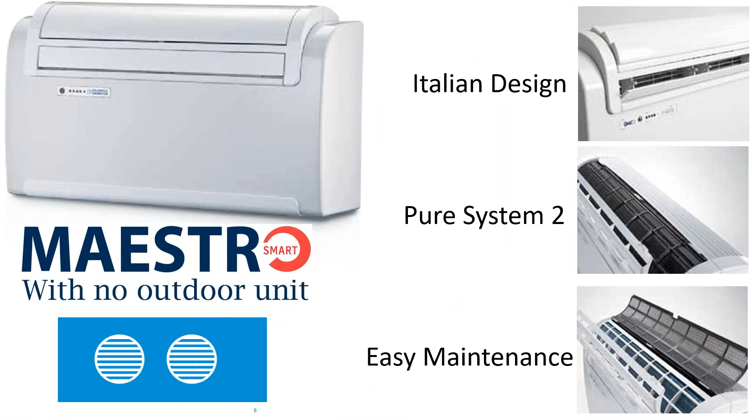So again, the impact on the outside wall is minimal by comparison to window units and, of course, split systems. And it is an Italian design. It uses a Pure System 2 for filtering, and the filters are easily accessible, and you can see them on the right-hand side here at the bottom, where half the filter is shown turned up, and in the middle picture you can see the filter in place.

Okay, and there are additional filters that come with the unit. There is a black filter that is carbon activated, and there is a green filter that is designed to remove particulate. So those are optional. They come with the unit. They can be installed directly on the existing filters. And of course, we recommend that the filters be cleaned on a regular basis.

The maintenance routine for this unit is once a year you would clean the filter. You would check and clean, if needed, the coils and also the drain pan and the drain line. So the maintenance is very minimal, but it does have to be done.

I can tell you that most of the calls I get where the unit shuts down on a code that says the drain is plugged, or the unit goes out on high pressure, it's almost always because the filters, the coil are dirty, or the drain pan is dirty. So I'll tell the folks on the phone, you know, clean the filter, clean the coil, clean the drain pan, and if you still have a problem, call me back. And I almost never hear back from them.

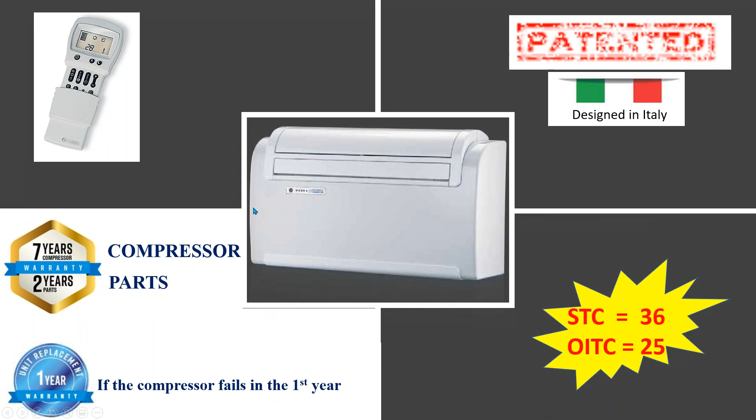So you can see in the upper left there, every unit comes with a remote control. I am beta testing right now a factory wireless Wi-Fi connector, and also some third-party vendors with Wi-Fi capable devices. So stay tuned. There'll be a lot more information on that coming.

It is a patented design. Nobody in the world has anything quite like this. There's a small company, Nova, up in Canada, that is actually a former engineer of Olympia Splendid's, but their product is a smaller version that has yet to receive any type of certification. So currently, I know that it's only sold in Canada, but it's the closest thing you may find to ours, but they have, again, one model.

The warranty on the unit is 7 years on the compressor, 2 years on the parts. And if a compressor fails in the first year, then we just give you a new unit, okay? And then, of course, that unit would have to be sent back to me or to the nearest service center. And that service center, we will investigate, because we have very, very few problems with parts. In fact, I have never seen a compressor fail in the US or Canada at this point.

And I think of the 500,000 that are in the field for as long as 20 years, only 2 compressors have been returned to the factory, and both of those, when torn down, were shown to have been hit by lightning.

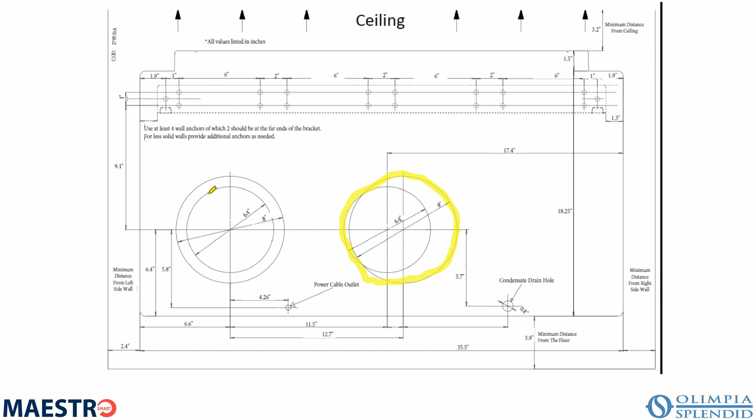And you can see that there are two possibilities for your installation, okay? You have these 8-inch holes that you can use, or you can have the 6.4-inch holes. We strongly recommend that the unit be installed with the 8-inch hole openings and not the 6.4.

You can use the 6.4, but you have a reduction in efficiency and a slightly higher possible sound transmission, because now the velocity of your air is going to be a little higher. But in some cases, when you have geometric constraints that don't allow for the 8-inch, you can use either 8 or 6.4.

The other penetration you're going to make in the building is the drain. So in your market, I think you guys have some humidity now and then. So this unit, for the most part, will re-evaporate most of the condensate. But in your market, which is obviously high humidity, you may not be able to re-evaporate all of the condensate. And so if there is excess condensate, it has to drain out through a drain hole, which should be a part of your installation, okay?

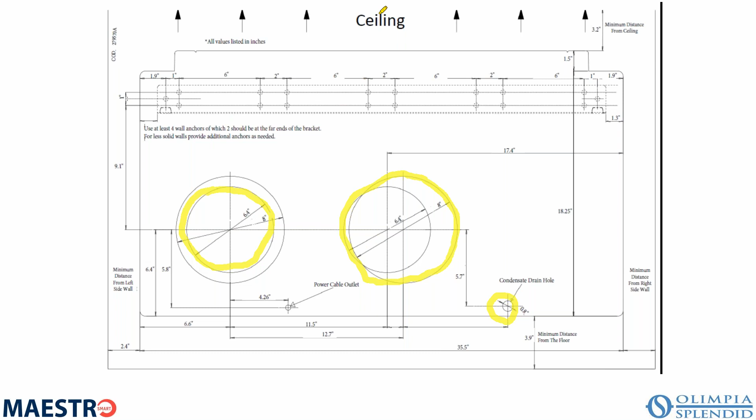So this template gets put on the wall, and then you can level it and then cut your holes. Note that between the two 8-inch or the two 6.4 holes, you have just over 4 inches. So two 8-inch holes should allow you to straddle a beam that's going up inside your wall. So you can have a 2x4 or 2x6 in the middle of those two holes and give you all the access that you need.

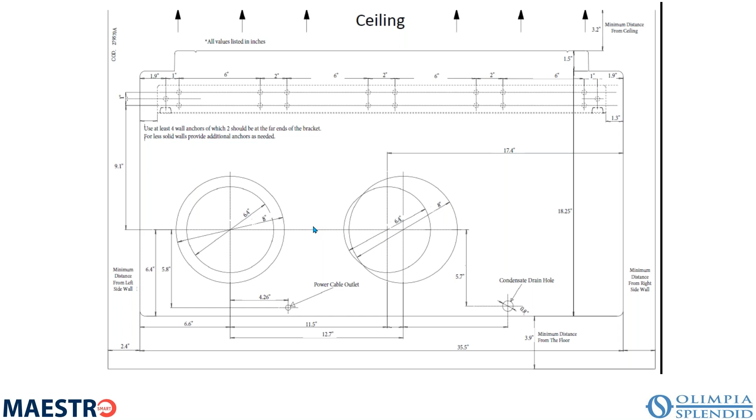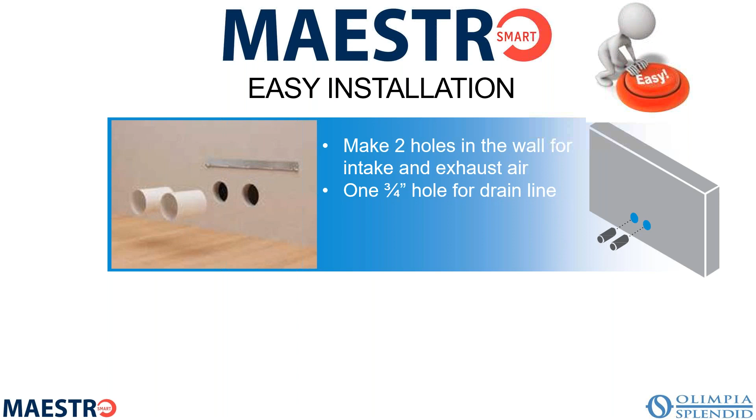So again, you make the two holes in the wall and you mount the bracket, and you can see the bracket here mounted on the wall. And of course, these units weigh about 86 pounds. So you want to make sure that you use anchors into the studs when possible, so that you can carry that 86-pound weight.

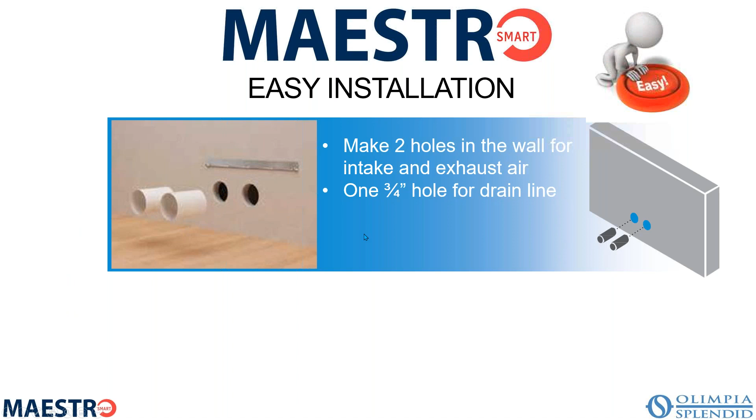So once you cut your hole between the indoor and the outdoor, and of course your 3/4 inch hole for your drain, then you put your duct on. So there's ductwork that goes between the inside ring and the outside grill, and there you see your ductwork, and this ships with the unit. And it's nothing more than a flat plastic that is then rolled into an 8-inch or 6.4-inch duct.

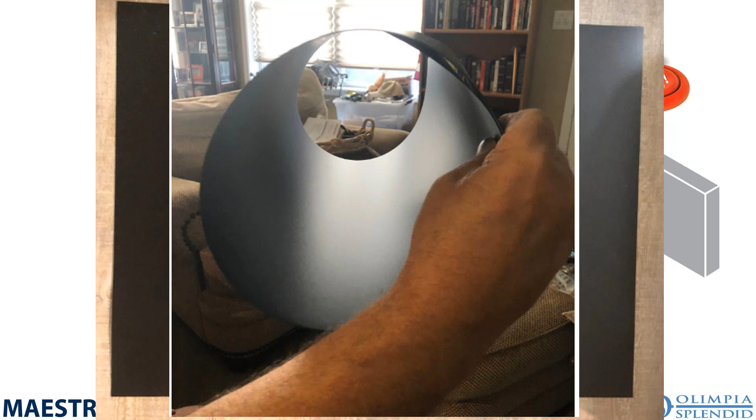And you cut it to the width of the wall. You put tape on the seam on the top and tape on the inside seam, and then you install that duct so that the seam is at the top. And when you drill your holes, you want to drill your holes so that it is a slight incline to the outside, and I'll show you a picture of that shortly. That way, if any water drives in because of a driving rain, it just rolls back out again off of this plastic. So that's why you want that seam on the top.

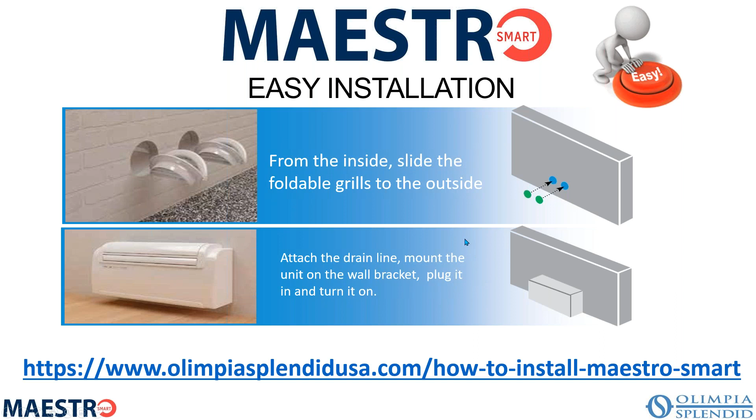And then you can install this whole thing from the inside without ever having to go outside, again, depending on the construction of your building. So the grills fold in half. So from inside the house, you put the chains and the springs on the grill, you fold them in half, and you push them through the hole, and then you pull them tight up against the wall. You're done outside. Okay.

And then again, once you get the unit on the wall, as you see in this lower left, I always tell people to use something that's thick, 3 or 4 inches, so that when you hang it on the bracket, you can keep the bottom held out, and then you can get your drain connected to it much easier.

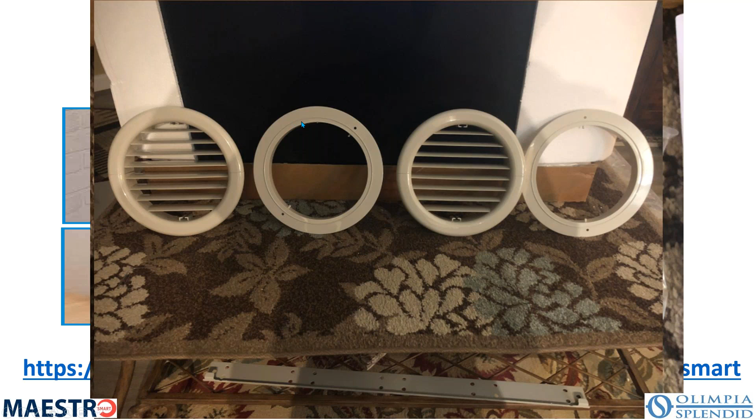So there you see the outside grill and the inside ring. And that plastic piece that was in that bag attaches directly to one side of the spring, and then you slide it into this little extension here on the outside grill. So now the outside grill has that spring and chain.

Fold the grill in half, stick it out through the wall, and then you pull the chains tight so that they clip and the chains mount on these little tabs on the inside ring. And you are done with the duct work. You are done with the grills. Now you can mount the unit on the wall.

The unit also comes with some foam tape. And after you put the grill on, you put the foam around the inside of this ring for both the intake and the exhaust. And then when the unit slides down against there, it makes a good solid seal.

And again, you can see the bracket down here that the unit mounts on. You see the two little clips here, and that's what actually holds the unit. And it's drilled in various places so that you can get into a stud situation. But if the studs fall outside of these holes, then you simply have to drill a couple of holes that will match your application.

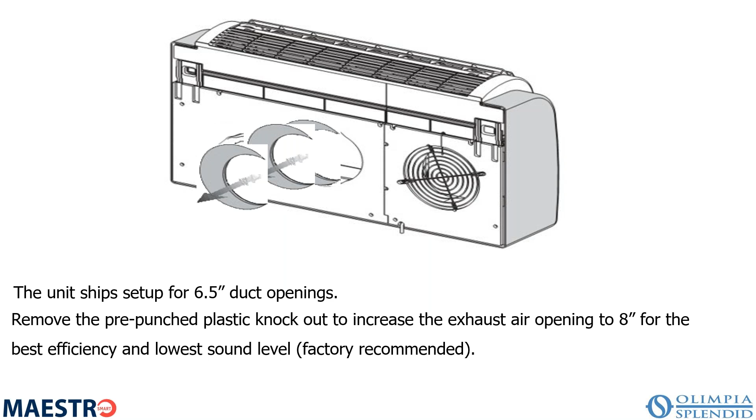When you install, the unit comes shipped from the factory for 6.5-inch openings. So if you're using the recommended 8-inch openings, you have to break off this tab, which is sort of like a crescent-shaped piece of composite plastic that is insulated. And so you have to remove that in order to have the full airflow required for the 8-inch holes. Okay.

And again, you're going to install your air intake and exhaust grills. Here you see the duct work that's gone through. Notice that it is pitched to the outside to allow any water from driving rain to come back out again.

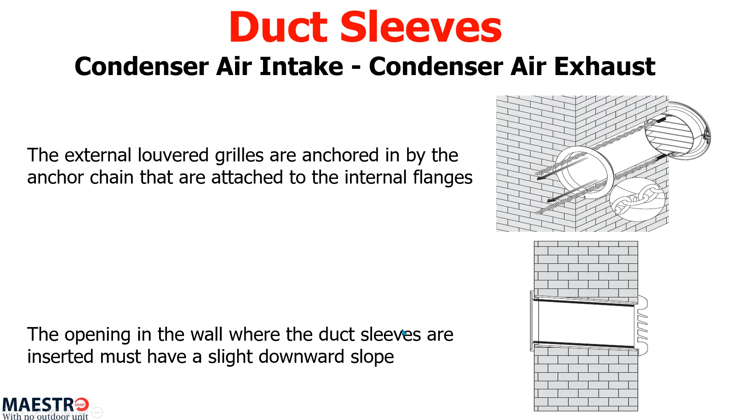When you install the unit, as I mentioned earlier, it can be either top or bottom installation, meaning as close as 4 inches to the floor or as close as 4 inches to the ceiling, and you can be on that wall anywhere in between. But if you install it in a ceiling application, the unit comes from the factory configured for a low application. So you have to turn the flapper if you're installing it in a high application. Okay, and it just takes a couple of minutes, and you change that, and now the air is pointing down as opposed to pointing up.

So if your unit turns off because of high condensate, it's usually a blocked drain or floats that aren't working correctly. Could be a pump that's failed. But again, these happen very, very infrequently. Okay. So that's a very quick overview of how the unit gets installed. Any questions at this point?

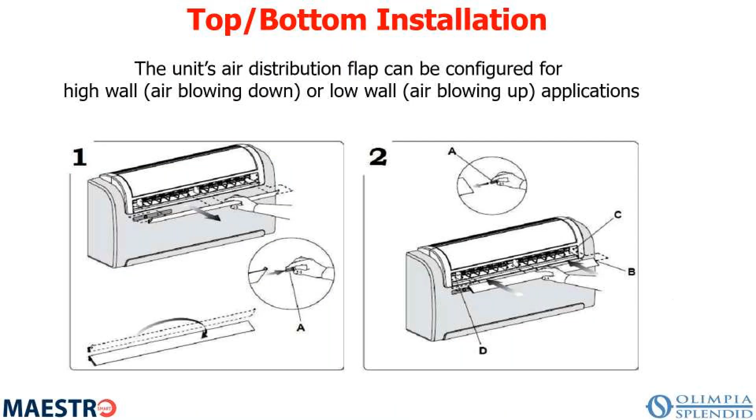Well, I think you answered some of them that I've been taking notes on. That condensate pump, though, you said it pumps up to a slinger. Correct. So where does the drain then come off? Still a pan under the condenser coil? Yeah, so under the evaporator coil and under the condenser coil, both, there is a drain pan. You can see the drain pan right here, okay?

Okay. And so the pump pumps it over the condenser coil, though. Correct. And the pump is only used in cooling mode, okay? Right. So in cooling mode, we pump the condensate up to the condenser where it re-evaporates, and again, 90% of it will be re-evaporated, but there'll still be in your market, I'm sure, some leftover condensate. In many of our markets, they never see any condensate in the summer because it all re-evaporates. But in your part of Florida, obviously very, very humid, so you may see some condensate come out in the summer, and that would be whatever excess is not being re-evaporated.

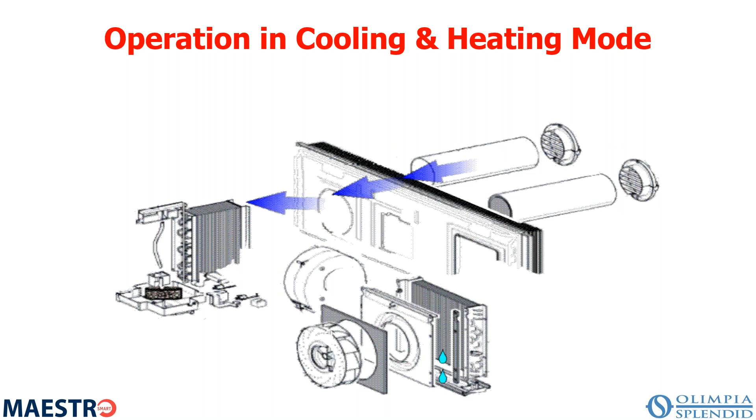Right. In the wintertime, this is a heat pump, so in the wintertime, we do not activate the pump. It doesn't do anything in heating mode, and we activate what's called a thermo actuator, which basically is a plunger that comes down and opens the seal so that the condensate from the defrost mode will just drain outside. Okay, so that makes sense?

Yeah, that goes back to the pump only operates inside the unit. It does not pump condensate. The condensate is gravity fed. That's correct. If condensate is coming out of the drain line itself, that is just a gravity feed, just like any other unit. It drops down and goes out.

Right. So now on the filters, you said there's 3 available: the micron, the green, and I guess the black that was shown. Any one of those 3, but can you not use them in combination with one another? Yes, you can. And typically that's what happens. And I'll see if I have, I know I have somewhere a better picture of those filters, but typically I don't show that all the time. But let's see if I can't find a picture of those filters. I know I have it.

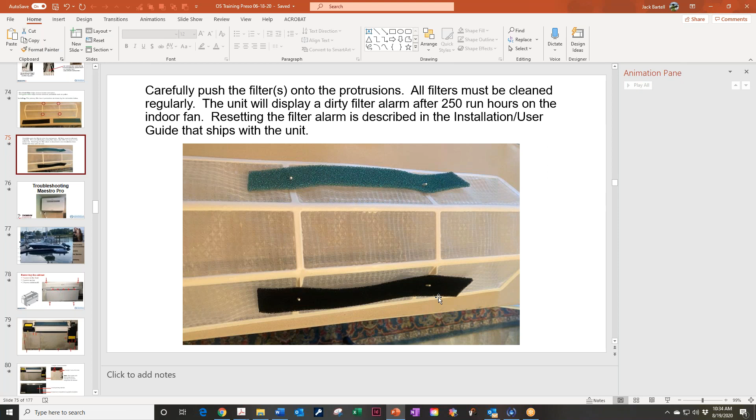There we go. Okay. So this is actually shown from the Pro model, but the green filter, and of course on the Smart model, the filter is black. On the Pro model, the primary filter is white, but both of them come with this green filter and this black filter. The black filter removes smoke and odors, and the green filter removes airborne particulates such as pollen. Here on the Pro model, it just mounts on these little tabs, and there are similar tabs on the Smart model.

And you see, these extra filters are not as big as the main filter, but keep in mind you're recirculating that air through, so it's constantly taking out pollen and constantly taking out smoke or odors. But again, these filters, the black and the green, are considered optional. If the consumer isn't as concerned about that, they don't have to put them on. But if they do put them on, then they just are cleaned on the same interval that the primary filter is cleaned.

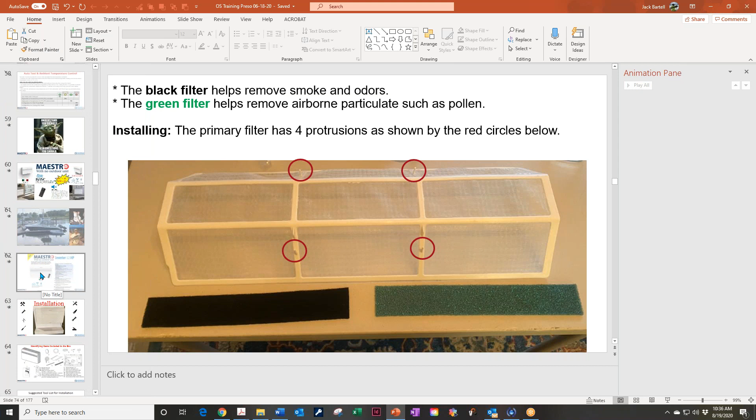So we have a timer that is on the control board, and when you reach 250 hours of fan operation, this red LED will come on for the Smart and tell you it's time to clean your filter. Okay. Yeah, but the filters, as you just pointed out, the green and the black are not as big as the primary filter. They are just auxiliary filters. Yes, and again, they are designed to filter the air as the unit is continuously operating, as long as that fan is on. So it collects particulate and cleans the air in the space, and they get washed on a regular basis.

So, what's the maximum outdoor air temperature for condenser air that these things like to see? We prefer applications where we get our full capacity, below 105 degrees Fahrenheit. We can operate up to 115 degrees Fahrenheit as designed, but when you get above 105 degrees Fahrenheit, you start to drop off capacity, and it becomes, what's the cost benefit of having reduced capacity when you have your highest ambient condition.

But in your market, I think you very rarely see temperatures over 95, although it comes with 75% relative humidity too. Yeah. Okay.

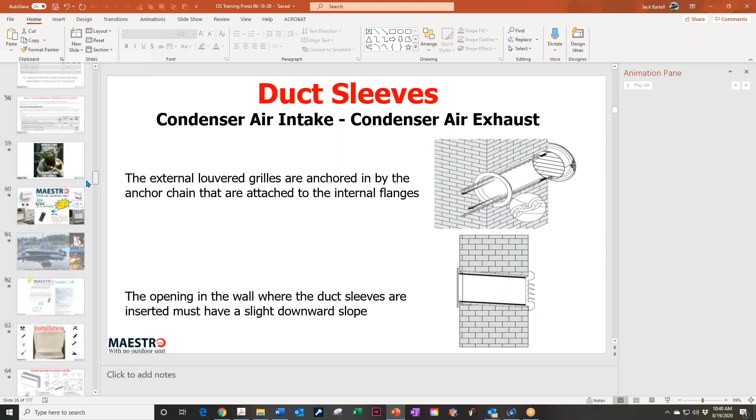Yeah, because I was going to say, as far as PTAC units, and I don't know if Dan or Nick have any other opinion on this, but I don't know that PTAC units, their sleeves or grills, are rated Miami-Dade hurricane. And that I don't know either.

I wanted to move to, because as you bring up PTACs, well, it's the problem with hiding slides, sometimes you can't find them. But we do have a PTAC kit, the PTAC retrofit kit. It's nothing more than a fiberglass cube made out of 1.5 inch duct board. And I've installed a couple of them in the Miami area already, and they work perfectly. So essentially what you do is you remove the PTAC, but you leave the sleeve in place.

And I don't understand why I'm not finding it. I have a picture of it somewhere. That's so weird. Aha, I knew I had it somewhere.

So basically the retrofit kit is you remove the old PTAC off the wall, you leave the existing louver in place. I have to switch this around here. And then you make a six-sided box made out of duct board. And here you see an example of one. And then you seal it with tape, and you just have this six-sided box. That gives you 1.5 inches of insulation on all 6 sides. And then you take that box and you just slide it into the existing hole where the PTAC was.

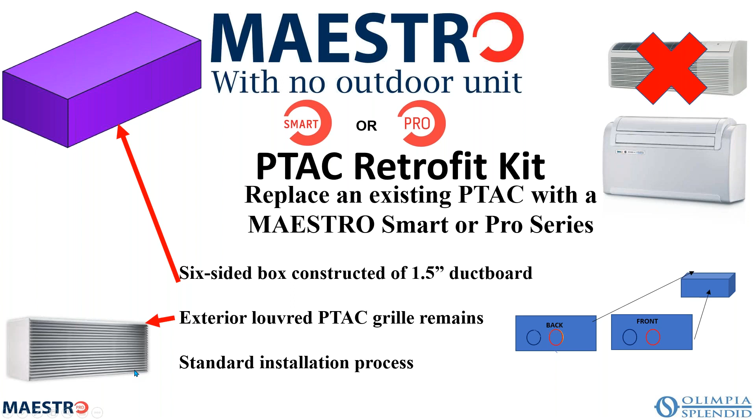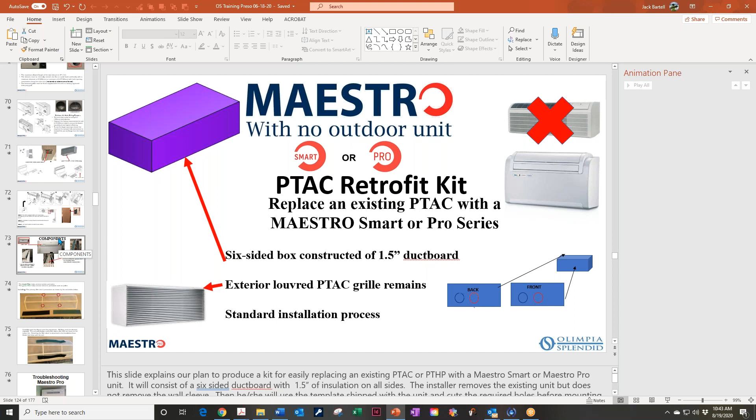Nope. Okay. But that's something the contractor has to build. We don't have that duct board item currently available. Right, yes. So the contractor can either build it himself or order it through us, or through you. And we would have that as an accessory.

Obviously, Dave, we're in the land of ductboard, so it's not too bad for us. Yeah, I would think that in your market, ductboard is used extensively, and so it would be quite easy to have those made up. And typically the PTACs are one of two different sizes: the smaller ones that were the older ones, or the larger ones that are the newer ones. So it's the older ones where you're doing most of the retrofitting, and the unit fits right over top of the hole.

So that was basically an introduction to the installation and application of a Maestro Smart. Now the Maestro Smart is single stage, 9,212 BTUs, and both heating and cooling. The Maestro Pro, which is the larger unit, is 11,600 BTUs, but it is inverter driven. And so it has a higher efficiency, and it has more operational modes, and does a considerably better job of dehumidification because it can vary the speed of the compressor; the compressor itself is inverter driven.

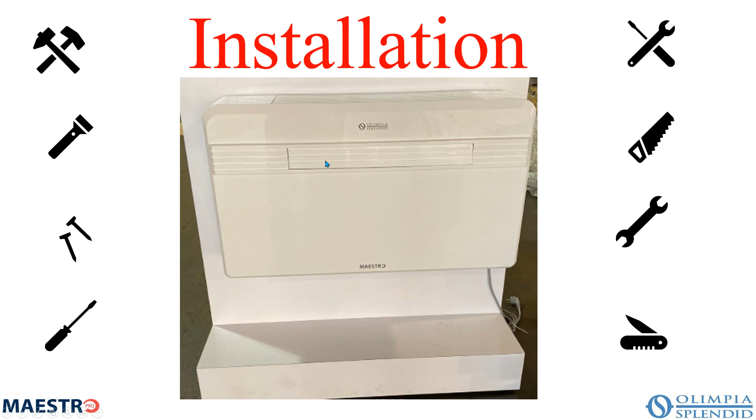Okay. And this is a look at the unit, and I'm not going to go through the installation side of this one because it's exactly the same. The biggest difference on the Pro and the Smart as regards installation is that the template that comes with the Pro is different than the one that comes with the Smart, because the drain is in a different place. So you may not recall, but on the Smart unit, the drain was located basically over on this side, whereas on the Pro, it's located here. Okay, but everything else is essentially identical.

So one of the things I thought we would do is take a look at the tech guide. I have a file that I will send to Nick and Dan that they can then provide to you as well, on all of the technical guides and installation instructions. So it's a zip file, if you will. And so you unzip it and you have the startup sheet, the training presentation, the specifications for mini splits, the specifications for Maestro, and the installation instructions, okay? So it comes with everything you need, including the troubleshooting information.

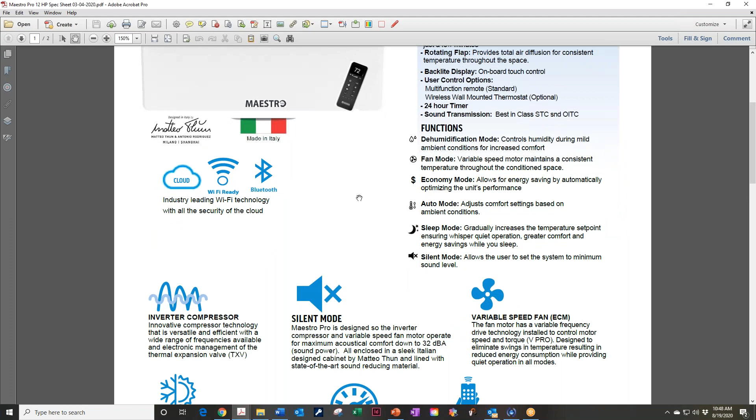So if we go to the Maestro Pro spec sheet, this is a single page front and back document that gives you all of the specifications you need and tells you all about the features and functions. And then on the second page, you can see all of the specifications and capacities, minimum voltage, maximum voltage, how you're rated for both heating and cooling, your combined energy efficiency ratios, what your amp draws are, your air flows.

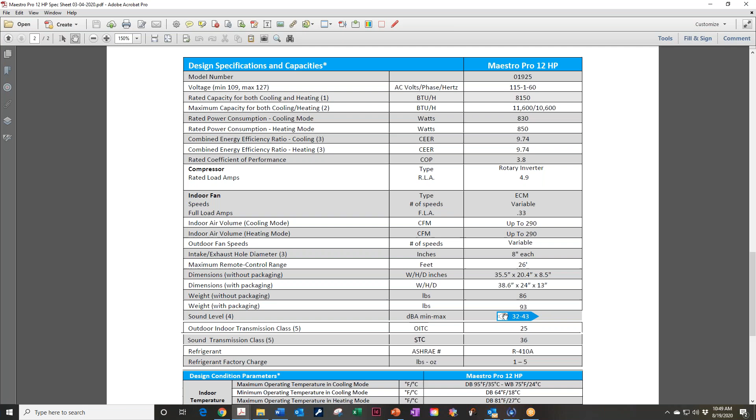All of these units, by the way, are obviously R410A in the United States. What that refrigerant's changing to is anybody's guess at this point. But again, it is a sealed system. And you can see the sound levels here are 32 to 43 decibels. Anything below 50 is considered acceptable, because 50 decibels is less than someone talking very low. Okay, so 32 decibels is typically when the unit's running at its lowest speed, and the 43 would be at its highest speed. And then, of course, you have your minimum and maximum operating conditions.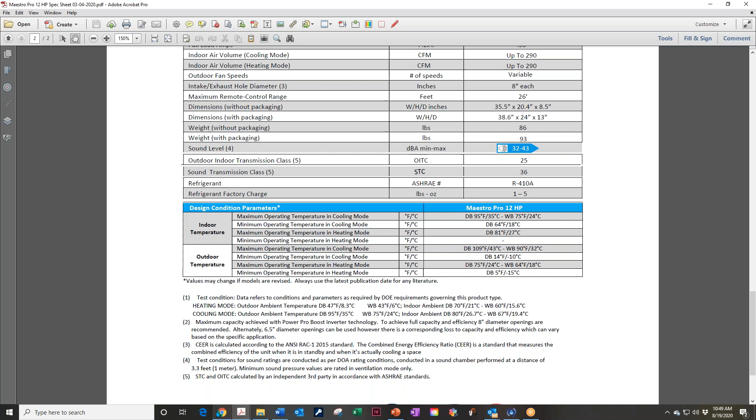We strongly recommend a load calculation be done for every installation. For instance, in your market, because of your high humidity, I would say the larger unit, the Pro, is good for 450 square foot, maybe 425, again, depending on the size and the construction of your materials. And the Smart is good for anywhere from 350 to 375 square foot. But I'm going to take you to a site called CoolCalc.

And this is based on Manual J. It takes very little time to do a load calculation. You can get a load calculation done for no charge, basically free, and then you can just look at the results. Or I think the cost is about $15 if you want a downloadable document that you can then give to either a consumer, or an architect, or a code official. Okay, so for $15 you can get that report.

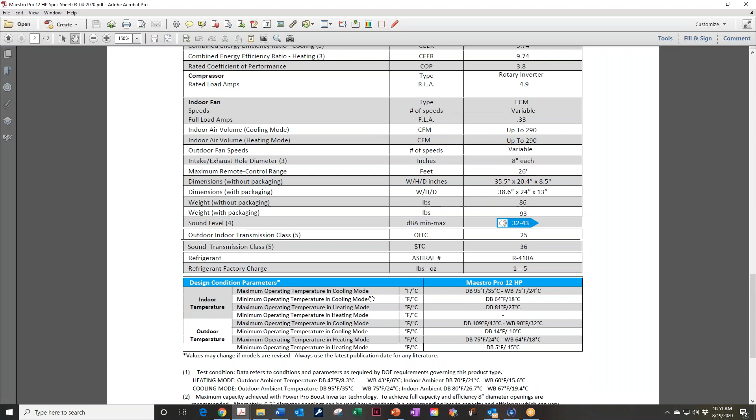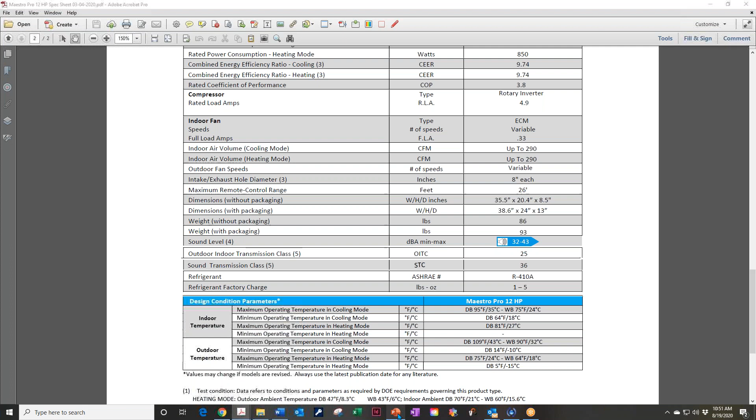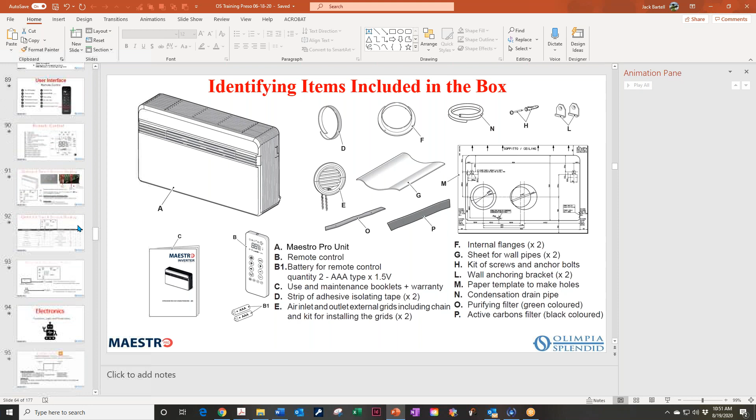So again, we have our fan speeds, dimensions, weights, sound levels, and outdoor-indoor transmission class, and sound transmission class, all listed here for you. So this also comes with a remote control, the Pro model. But one thing that's different about the Pro model remote is it's either Celsius or Fahrenheit. So there's one button on the remote that allows you to change the display from Celsius to Fahrenheit, whereas on the Smart, you either have a Celsius remote or you have a Fahrenheit remote. Okay.

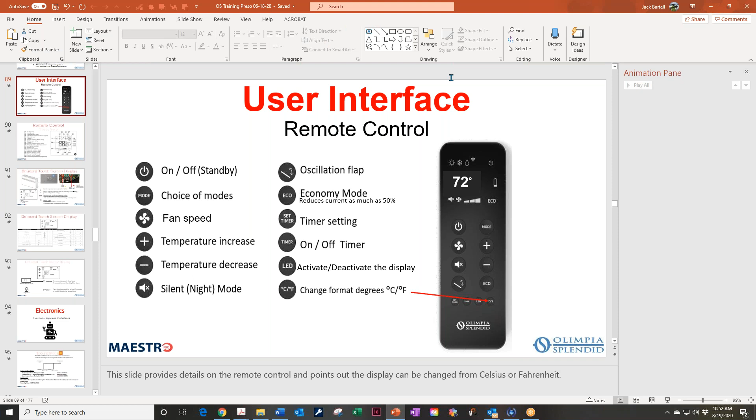That is pretty much the application side. I did want to point out that we do have a couple of vendors we're working with to provide Wi-Fi and wireless access. And so I'm going to turn on my camera here. So I have to find the camera.

We see you. I'm glad you still have your clothes on. Yeah, right. Yeah. But why am I not? I'm not seeing it.

There we go. Okay. So this device here is called a Cielo Breez Plus, and this mounts in the room, and you have to plug it in. It's got a power supply that's required, but now you have remote access to the unit without the use of the remote. You can access it from your iPhone or your Android, and you can also access it from your desktop. So you can have Wi-Fi capability. The factory is developing its own. I'm doing some testing with it now, but this is available today if you want a solution for Wi-Fi capability. Okay.

And what it does is you just download the app and you put the unit's remote control next to your phone, and it basically does this Vulcan mind meld where it takes all the commands out of the remote and emulates that on the app. So a very, very nice option should you have a need for it. So that is primarily all the information from an application and sales perspective.

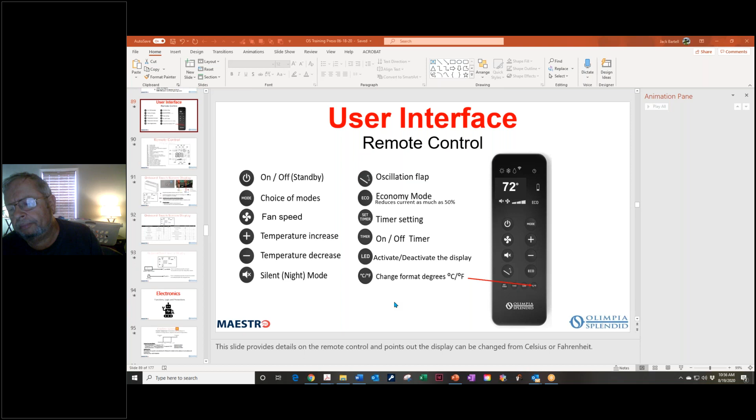And also by comparison to a PTAC, you can actually cut the grill off from the outside, push the whole unit into the building. Now you have a huge space to crawl through to get in and out of the house. You're not going to do that with this unit with 2 small 8-inch holes. All right, I'm going to open it up for questions again.

All right, what I had here was, you mentioned that obviously the refrigeration system is a sealed system. Are there access ports already on? There are not. So if it has to be serviced, you have to mount a piercing valve. Correct. Well, I hate them. They leak. I don't care whose they are. I've never found one that lasts long term yet.

And the reason the factory chose not to put access ports on is because that's needed so infrequently that it doesn't make sense to put them on all units, where 99% of them will never be used because it's a sealed system. So if one assumes that the only reason you're going to get into the refrigeration system is if the unit develops a leak, or if you have to replace a strategic component like a compressor or a reversing valve, then of course you're going to have to put a quick tap on there to recover your charge.

If it's because of a leak, then your charge is gone. And then when you have the system open, you install T's in the suction, the high side, the low side, and braze them in, as opposed to having those clamp-on ones that will fail eventually anyway.

So the Pro has the inverter compressor, and you mentioned that the fan is ECM. Now, is that fan a single motor with double blades, or is it two separate motors, one for the condenser and one for the evaporator? Two separate motors. Okay. Let's see if we go back up here. No, that's fine. That answers the question.

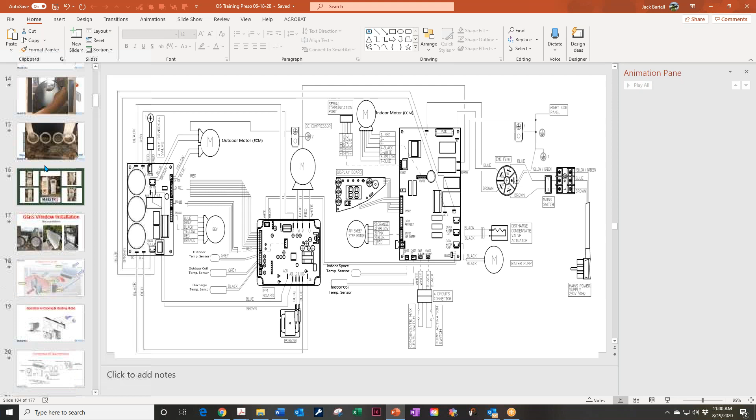Yeah, I know some of the hotels that had the Amanas in them put a drain line inside the building because they didn't want that streak on their walls outside. Agreed. And our unit, both the Smart and the Pro, can accommodate that without a problem. I have another slide here installation-wise that would probably show that better, but you can go directly into a drain, and if you're going into a drain that's in the building, we just recommend that it be properly trapped.

And I know I have that slide in here somewhere, but I just can't find it right now. Don't worry about it. Yeah, but like you say, it's just a cap or a drain that you cap off. So, all right, other questions?